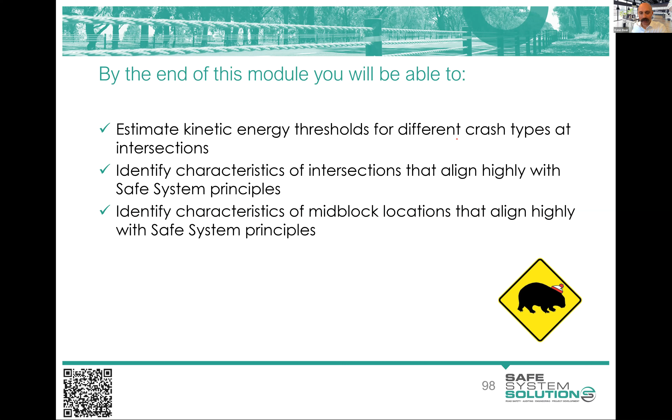Don't forget to count your wallies, of course. Hopefully you all did that last time and got your quiz answers in.

Right, let's talk about intersections. I am going to give you a little exercise to do shortly, which will give you an opportunity to also have a stretch and fill up water and stuff, but you'll do a little bit of thinking about some intersection design or form choices.

So what we do see is that risk of runoff road crashes at intersections goes up significantly. It also happens to be the one place around the network where we do see quite a congregation of point source hazards, fixed hazards, such as signal pedestals if it's a signalized intersection, but we see power poles a lot, often culverts, and different fixed objects. So that runoff road risk is even enhanced a little bit more.

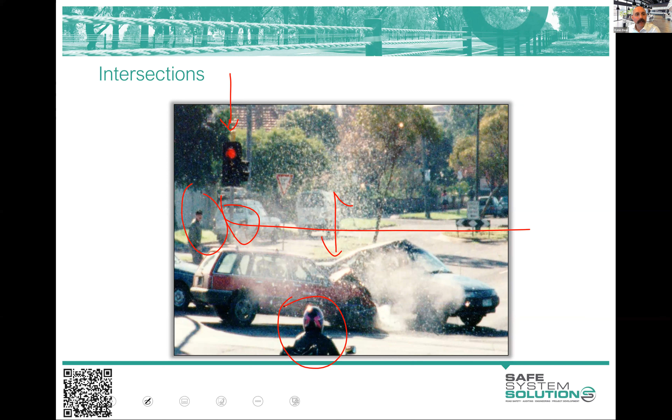The Monash University Accident Research Centre came out with a few principles for intersection design for high alignment with safe system principles. And what we see there is some interesting stuff in the way they're talking about it and thinking about it.

Now, you remember at the end of last session, we talked about exposure times likelihood times severity being our formula for risk in a safe system assessment. We're going to build on that significantly in this module, and your exercise after this module will be heavily focused around those elements of exposure, likelihood, and severity.

If we look at these principles, the first thing they're saying is, can we have fewer vehicles? That's really an exposure factor, isn't it? It's the number of people, the number of vehicles exposed to crashes would be down. Fewer intersections is also sort of in that exposure category.

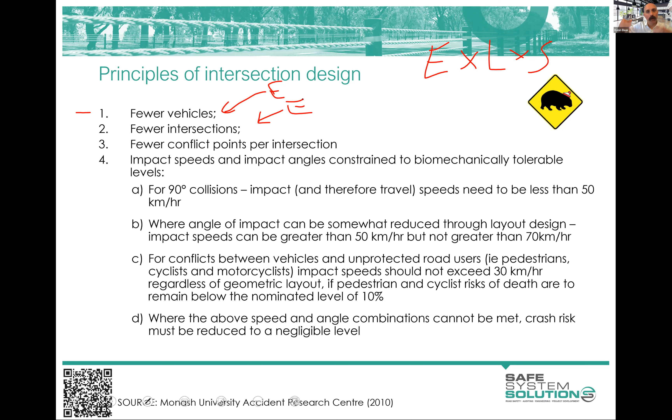If we are able to eliminate intersections, there's less points on the network where that intersection crash is able to happen. And maybe still we're having the vehicles that would use those intersections congregating to another intersection, but we might be able to do more at that intersection for risk reduction.

That's pretty run-of-the-mill transport planning style thinking, to consolidate access points and intersections if you can. But across Australia and New Zealand, we have a real tendency to provide hugely free access onto our often arterial road network and higher speed network, where we're having side roads, driveways, and access points.

And if you're able to reduce the exposure by reducing those, you're getting better alignment with safe system principles.

Then we go into fewer conflict points per intersection, and that is a likelihood factor, okay? So you may be thinking, is that not an exposure factor? There's less conflict points. But no, we say if there's still conflict points available at this intersection, we'd call it a reduction in the likelihood. You've made it less likely to crash, less conflict points. If we've eliminated those conflict points by closing the intersection, for example, or grade separation, flyover style stuff, we've changed the exposure. But this is a likelihood reducing factor, along with all those other wonderful things like ensuring good guidance through the intersection, advance warning, clear travel paths, and those sorts of things.

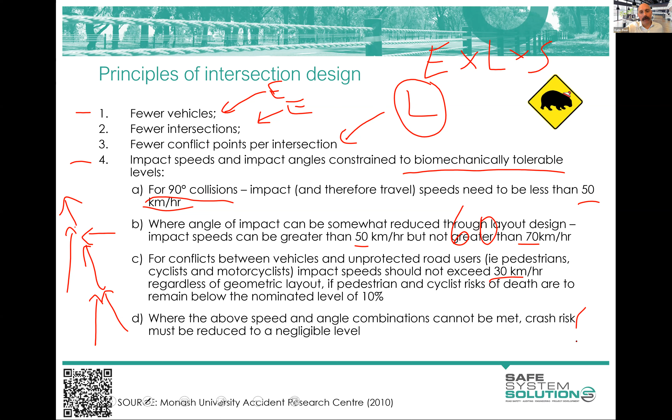When we add vulnerable road users into the mix, we're looking at 30 kilometers per hour or below to try to really dampen the energy of that to something that is generally tolerable to humans. And if we can't meet these requirements, we're really wanting to alter risk and reduce risk to negligible levels if we possibly can. I'll talk a little bit more about that in a bit.

So we gave you some of the graphs and some of that colored chart last session. I'm putting some more stuff here. We see for car-to-car style crashes, pretty much at intersections, we're fairly comfortable with bullet vehicles at 40 kilometers per hour or below. Really, even 50 kilometers per hour or below is the ultimate threshold there at 90 degrees.

But then 60 kilometers per hour for anything in between that to the head, we know that we can get more speed, which is survivable. And this is using something like KEMM-X or KEMM, which is the kinetic energy management model. We plug in speeds, vehicle types, geometry of the intersection, and it's able to spit out the kinetic energy and tolerance levels.

Now, in a safe system assessment, you're not going to be required to go to that level of detail and precision. What we're providing you here with this table and the color chart, that's enough to give you a general indication of how severe these crashes might be, okay? We're not going to need you to go to that level, but you might like to know that there are computer models you can use to generate some of these ideas of forces and biomechanical tolerability.

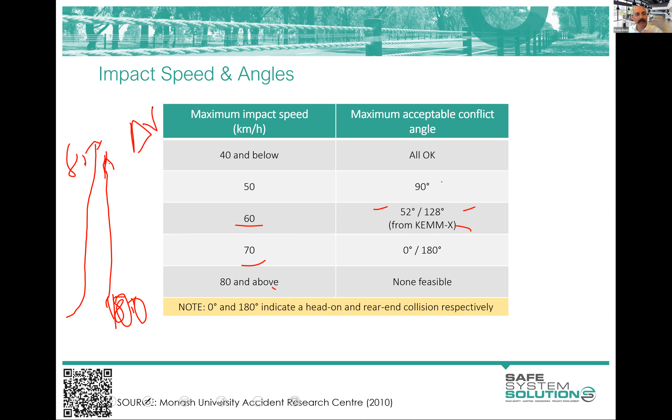So we're back to the physics of it. For new or existing intersections, you can work out your angles of impact - you don't even need to be this precise, you can do it at a higher level. So, vehicle coming out of this new proposed intersection, vehicle coming down there, that's about 90 degrees, somewhere around that.

So the speed for passenger vehicles, we're talking somewhere around 50 km/h or below is what we'd be aiming for there. On the other side of the road, they're sort of in like that - we've got a bit more angle to it, so maybe around 60 for that side because it's got more angle. And if that crash happens over there, this one coming in, that's pretty much a right angle, we'll give that a 50 as well.

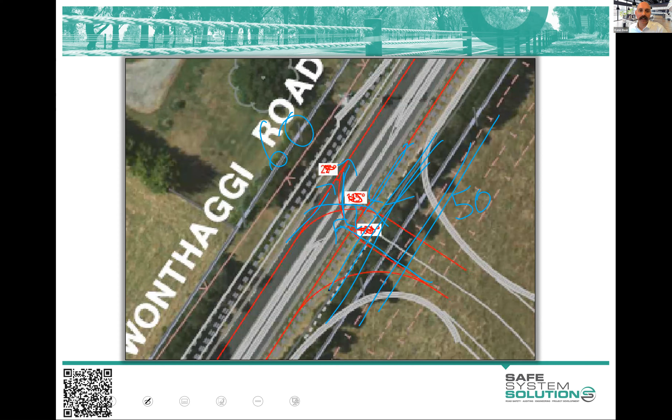So you're able to start doing that broad brush looking at speeds and angles, thinking about passenger vehicles. Of course, if you've got other road users - maybe a shared path crossing or something - you'd be thinking about vehicle speeds through there and the tolerability for vulnerable road users, pedestrians, cyclists, and whether we need to slow vehicles at that point. So it's becoming angles, speeds, and road users involved in these crashes to give us a real indication of what is tolerable.

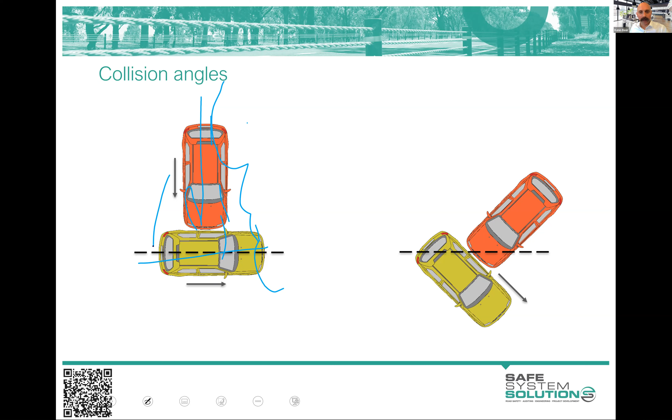I talked briefly about secondary crashes, and I'll give you an exercise shortly. Thinking about vehicles, it's pretty rare you get a very square, clean right-angle crash directly like this. More often the vehicles have attempted to avoid, and clipped, and hit in all sorts of ways - it's very chaotic. But there are secondary crashes, which we talk about as run-off-road. Sometimes they start with an intersection style crash and then run off the road.

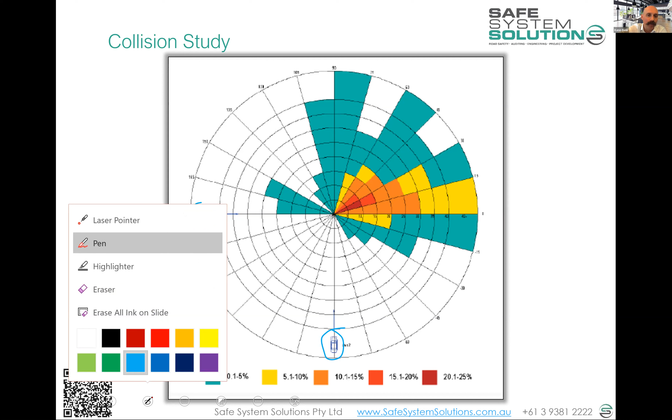The Centre for Automotive Safety Research at the University of Adelaide did a big study of lots of intersection crashes that had secondary crash impact as well - vehicles leaving the road, hitting poles, culverts, other roadside furniture and the like. They replotted all those onto an axis, and you can see the bulk of the secondary crashes going into those sorts of areas. Now, did they need a big piece of research to tell us that? Probably not - I think you'd all have come up with a similar conclusion.

There are some interesting anomalies of avoiding and clipping and those sort of things, but just something to remember in our intersection design and thinking around risk at intersections.

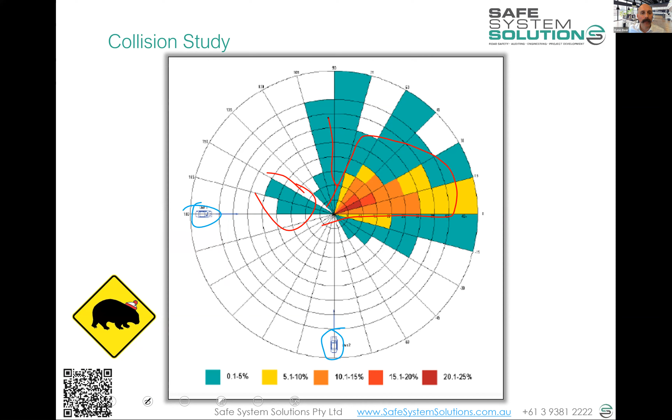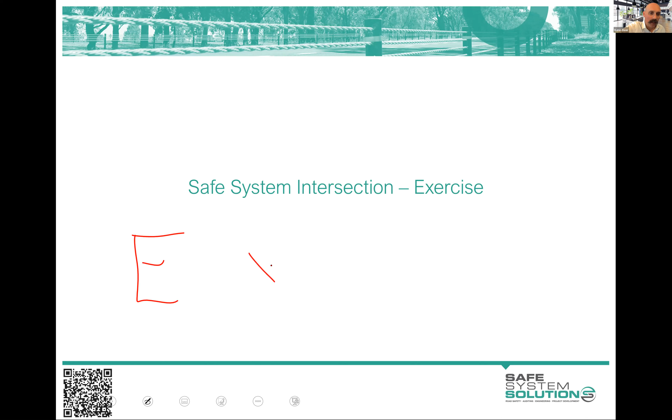Okay, let's get you doing something, because I know you're all chomping at the bit to use this exposure times likelihood times severity, and that's what we're really going to be focusing on here - well, part of what we'll focus on. Let me give you the scenario. Actually, I'll pause before that and check in with Cassie to see if there's anything I need to deal with, because I want you writing into the chat as I go, and I'll answer or talk about topics as we go.

Kathy, anything pop up that I need to deal with?

Yes please - there's a question about reducing the number of intersections, which you talked about earlier. That may lead to increased volume at remaining intersections, so does the overall network exposure stay the same? Really good question. In a safe system assessment we often have pretty good traffic modelling to work from, so you can actually attribute and quantify that and utilize it in your scoring.

If we've drawn a scope boundary around our safe system assessment, you just make it clear in your assessment that that is what you're dealing with. And if that reduces the traffic volume at that intersection you're scoring, you'd probably note that this will distribute traffic to other areas, and it should be noted, but you tend to look just at that intersection if that's the scope of your assessment. The reason is, where do you tend to stop if you go too far out that way? But the principle you're thinking about is really good.

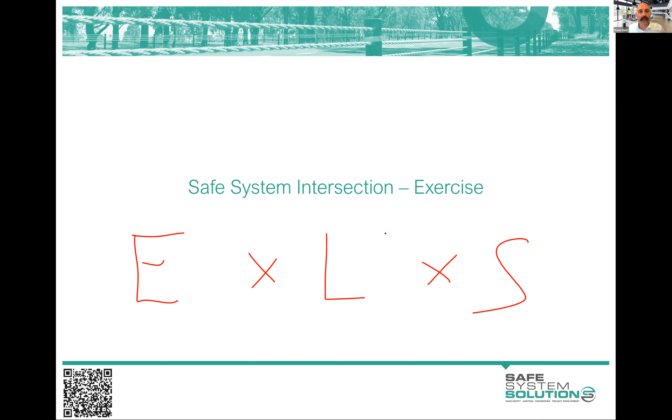Now we do have a fact sheet, and I'm jumping way ahead in the course here, on how to deal with projects that have multiple routes and thinking about multiple intersections and the like. So we'll provide you with some more specific guidance on that in one of the later modules. Good question though, thank you. Thanks, Ken, that's all for now.

Okay, well let's do a little exercise here, and I'll explain this intersection first, and then I'll tell you what you're going to have to do.

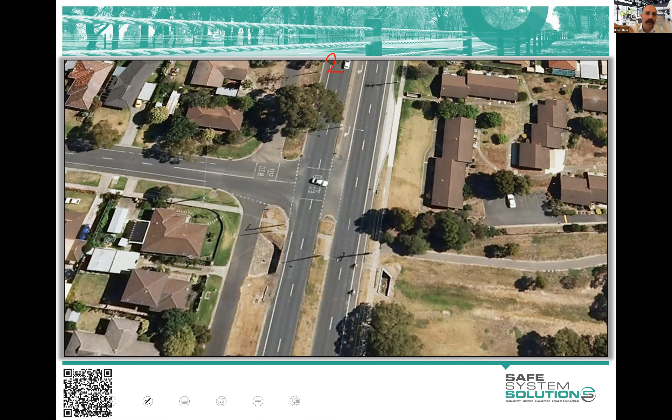So here we go. We've got an arterial road with 21,000 vehicles a day, we'll get 10% heavy vehicles, speed limit 70 kilometres an hour. We've got a side road here with 1,800 vehicles, 50 kilometre per hour default speed limit.

We've got here a shared path. This is a culvert drainage thing, sort of, water goes in there and spills out into there when there's big rain. What else have we got here? We've got a bus stop. And you can see there a little, I suppose, Danish offset crossing, or Z crossing as some people call it.

Interesting, I would say that's the wrong way. We like our Z crossings or Danish offset crossings to face into traffic like that. That's an aside, that's not the purpose of this exercise. I was just, as I was drawing over it, thinking I'd like to see that the other way. You want people to walk in and down, facing traffic or crossing facing traffic. Anyway, they're probably constrained by this. Sorry, I've gone on a tangent there.

Anyway, what else can I tell you? Up the road here, about 2 kilometres, is a set of traffic signals. Up the road about another kilometre is another set of traffic signals, probably 800 metres or so. What else can I tell you? This is a service road, takes vehicles in both directions, really just providing access to a handful of houses. It's got a little exit point up here as well, and there's another opening quite a bit further down. Residential area, school about 400 metres down the road, the side road.

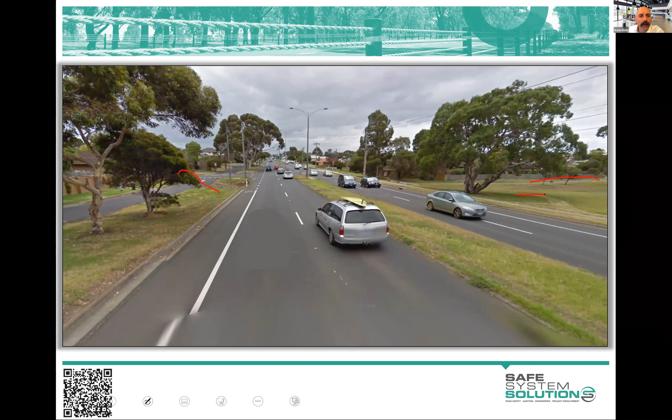The intersection does have a crash history, and the crash history involves vehicles turning in like that and being struck by vehicles coming through here, and vehicles coming out and being struck by vehicles there, and a more minor incident there. So quite a decent crash history, but we're not always driven by crash history these days—it's not the only way to work out risk. This one has presented itself in crashes.

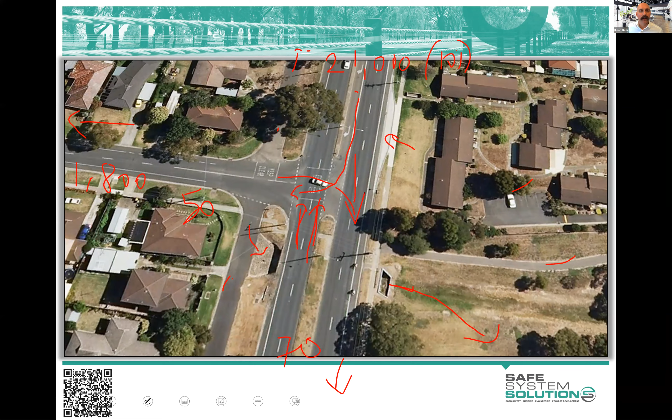So your exercise here is to redesign, redo this intersection to remove fatal and serious injury crashes forever. Okay, we'll come as close as we possibly can. And you've got a budget of $3 million to do that.

Now you might be saying, well, I don't know how much stuff costs. That's okay, I am your cost estimator tool. You can simply type into the chat 'cost' and then put cost-dash of whatever you want. Cost of putting up warning signs, and I'll go $3,000.

Putting up some warning signs, approaching the intersection. Cost of grade separation, a big flyover, I would say $63 million.

So anything you want cost estimated, I'll do it instantaneously. Or if you've got a good idea of the cost yourself, you don't need to put the cost in, but you can say I can do that within that budget, no worries.

So you've got a budget of $3 million. You can't close the intersection. Now, I know you were thinking back to those Monash University principles, less intersections. We just talked about it, saying oh, I'll just close off that. That's going to be pretty good for at least those intersection-related crashes. Might want to do some other things too, but that's pretty good.

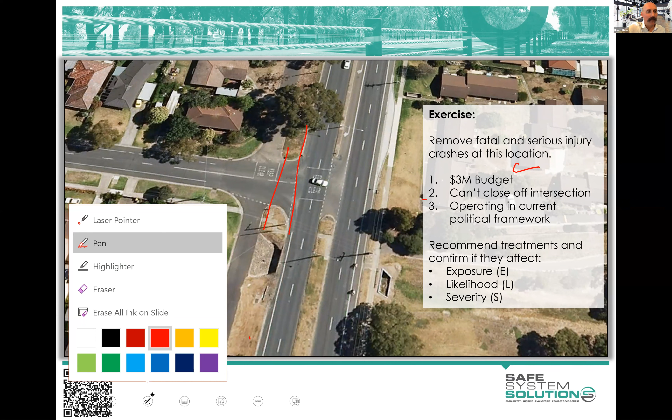Unfortunately, we can't do that. We've done the community consultation, and it's been decided by the minister that this has to stay open. Not only open, but all movements have to be available in and out of the intersection onto the main arterial. You can tweak the service roads if you want, but you have to be able to turn in from this way, out both directions.

And the third constraint is that you are operating in the current political and operational framework that you are currently in. This means that if you're proposing something quite radical, you need to give us some indication of how you're going to navigate this through the system.

If you're a consultant, you're trying to convince your clients and move it up the line and get it out there. So how are you going to help do that? Or if you're in a road authority, how are you going to convince your boss, the public, the community, and the politicians that this is the way to go? So have a think about that if you're really pushing boundaries.

So what I'm going to ask you to do is pop your ideas into the chat when you get there. But each time you say something, tell us whether that influences exposure, likelihood, or severity. So if you were to say, I'm going to do a warning sign down here, intersection ahead or something, you put warning sign and then a little L after it. You type in warning sign, L, meaning that will reduce the likelihood of crashes.

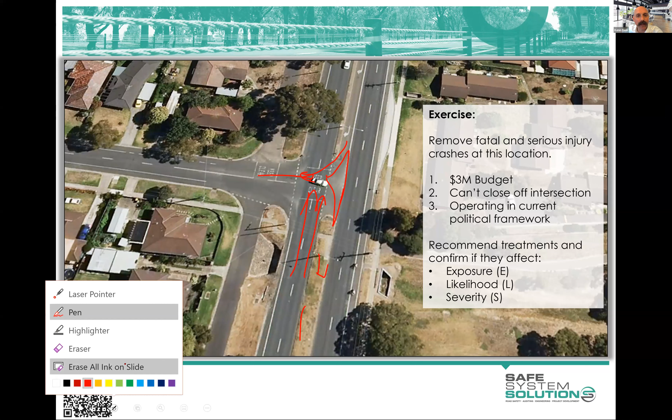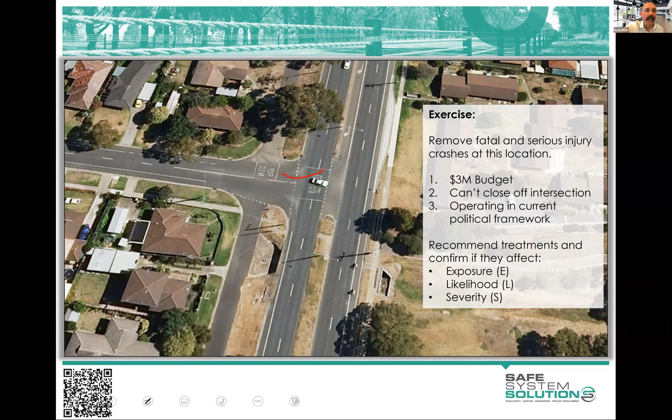So what else we got? Okay, some people wanting left in, left out with U-turn facilities, and that provides some interesting reductions in, I would say, likelihood of crashes. You know, we've still got an intersection there. We've still got the people coming in, turning, or doing U-turns down here and coming in if you block that. So we kind of still do have the same conflict points.

This is a little bit like what we said. We're sort of moving conflict points up here to potentially different, better scenarios, but exposure-wise, I'd say sort of the same, maybe reduction in the likelihood of crashes. And severity, well, yeah, maybe, because we've got to sort of turn out there, or we're going to come in there, and so the angles will potentially be better. So I'm liking that, a bit of severity reduction as well.

What else do we see? Yes, some acceleration lanes, and then some people talking about, okay, raised intersections, raised crossings. So people are saying some raised thresholds on the side road here. So that's an interesting one. Seeing some raised thresholds on the side road. So that'll slow vehicles approaching, and that's maybe nice. Maybe slow vehicles entering, and maybe stop them taking a last minute dash in there to try and beat traffic and the like. So reduced likelihood, I'd say, by a little bit.

They're potentially a bit of reduced severity if there are any pedestrians trying to cross this way.

Then some others are sort of saying, well, what about raising that whole intersection? Raised intersection. That's an interesting one, isn't it?

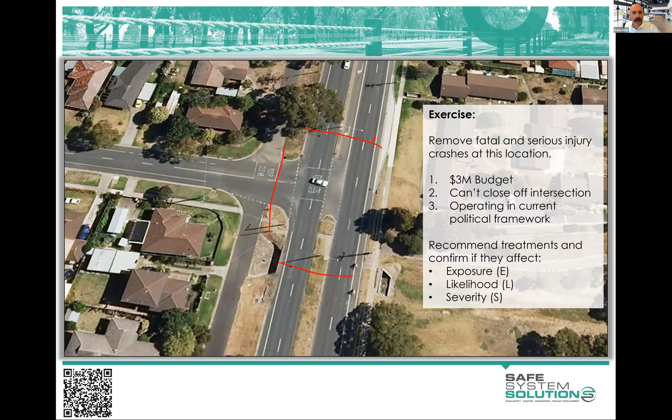Really great thinking. A lot of the thinking I can immediately see we've got some pretty good experience in the room, or people who are sort of thinking quite well. So a lot of people are saying signals, and you'll see me use this little symbol and tick which one it is. Really likelihood. We just talk about likelihood factor.

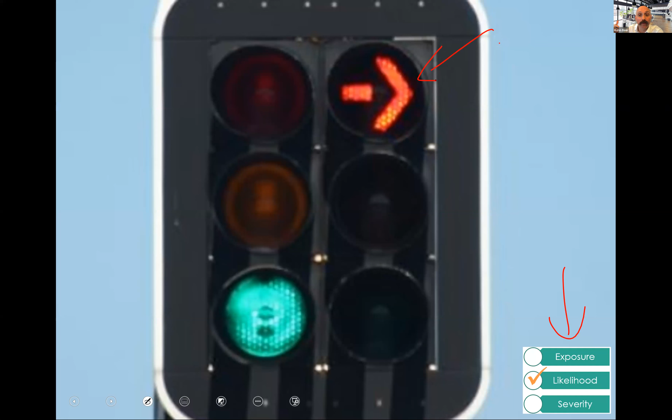We know there's things that can be done, like fully controlled right turns, that really help reduce the likelihood of crashes even more, getting the most we can out of these traffic signals. So we know that they're a proven technique for reducing the likelihood of crashes.

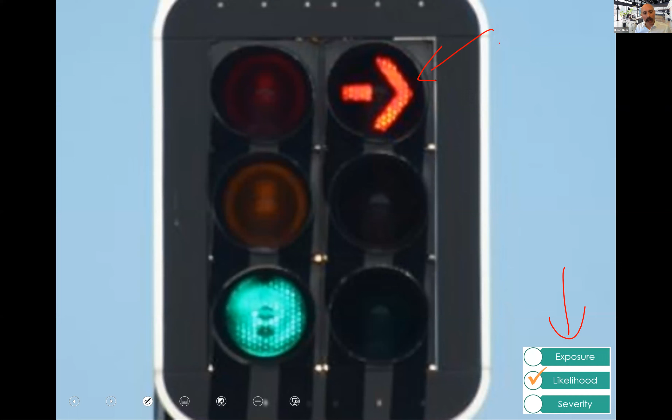And I could take this, I could do the same heat mapping, outer suburban Brisbane, outer suburban Sydney, Adelaide, Hobart, Auckland, you name it, pretty much everybody's got this issue where they have the space and the roads are higher speed and the intersections are signalized because the traffic volumes have got to that point, they signalize them. And that is where the bulk of our death and serious injury is happening in these areas.

And in fact, if you take the top 100 intersections on pretty much any of those cities or states, you take Queensland or Victoria, you'll find that the bulk of the top 100 are signalized intersections.

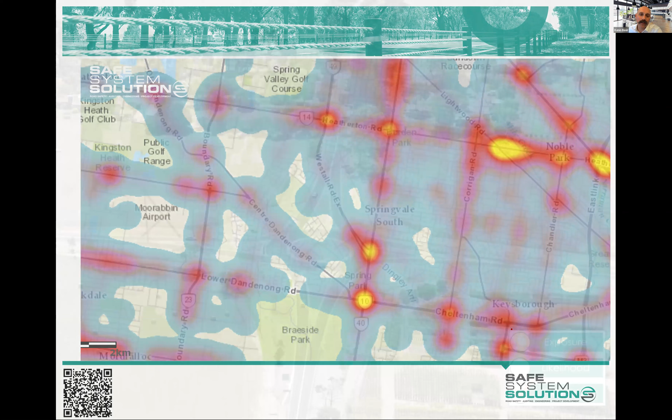And then the first thing I suppose to say is, well, does a roundabout perform any better than that? I mean, certainly we know that from a traffic operations perspective of moving vehicles through it, we don't get as much throughput through a roundabout. And some of you are 10 times the traffic engineer I'll ever be in terms of understanding traffic flow theory and the like. But this is not going to operate as well from a vehicle throughput perspective and saturation and everything like that.

But what it does do is it significantly addresses the severity of crashes. And I'll walk you through why that is shortly. But we've got a real severity reduction technique here with a roundabout.

Now, like a lot of you probably discounted a roundabout straight away for a number of reasons.

And the other thing some of you probably immediately wanted to discount it was, well, it's a major road and you've got a sort of minor side road, and a roundabout works better when the flows are kind of balanced. Not sure it's the right form from that perspective.

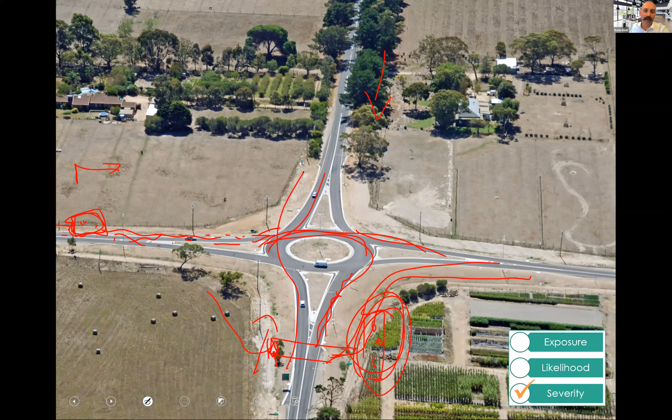There are ways, though, I think we can still think about that roundabout still being an option. We can think about things like metering of a roundabout - always fun. Put a pedestrian crossing up here, maybe have your pedestrians come up through here, and then you put a loop down the back here. So when the banking of traffic gets to that point, these signals trigger, and some of these get out and go that way, and some of them get in here and store up. You can get much more life out of roundabouts from a traffic perspective by doing those sorts of things, and maybe we don't need to make them as big as that.

Now, this is a very, very different road environment, isn't it? But I do love looking at this one and saying, okay, in the UK, it's just a little bit of paint, isn't it? A little splitter island as well, but a bit of paint. So a larger vehicle, maybe a service vehicle or something coming through here, could track very easily over the top of it. Okay, so that's good.

But then you might say, well, what's the purpose of it? What's the point? What safety benefit are we going to get out of that? We're not getting any deflection, so are we going to get speed reductions and things like that? But the key element of this is that anybody approaching this does not believe they have ultimate priority.

Whereas if we have a set of traffic signals and there's a green light, somebody believes they have ultimate priority. If it's a road where the intersection's got a give way, passively controlled, give way or stop sign on the side road, the main road believes they have absolute priority. I mean, they do under the road rules, they have absolute priority. Right? But absolute priority comes with lack of attention, continuous high speed, and really there's nothing to disrupt that sort of continual flow of the vehicle.

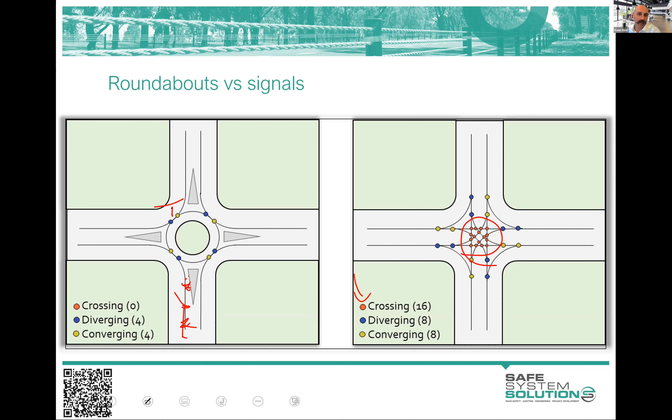Interestingly, we don't actually give roundabouts a likelihood reduction in a safe system assessment. You'd think we should, because we've got less conflict points, less ways to crash. But we know from history of crashes that we have lots of rear end style crashes, minor, but lots of them. And if they're multi-lane roundabouts, we've got merge type crashes as well. So we tend to keep it simple and say a roundabout is a severity reduction only intersection form compared to signals or passively controlled intersections.

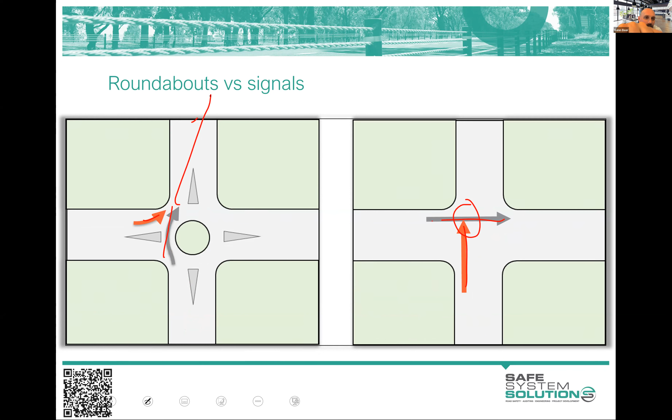The crash angle is better. Back to vectors again - the crash angle there compared to this one will bounce off. It's a much friendlier crash angle.

This one goes back to the point that people drive in all sorts of states of consciousness. They've worked a double shift, or been at their brother's wedding and pulled an all-nighter and then driven home, or they had a fight with their partner. We would love everybody to be alert and switched on - they're not. There's so much driving going on that's not with it. You may have been in that state - driven straight through a red light and thought, did I just run straight through a red light? Or done 10 minutes of driving and don't remember any of it. We're not with it half the time driving.

There are engineering features of the road environment we can put in that bring people back to attention. A roundabout's particularly effective, as is any horizontal or vertical geometric change - anything that goes up and down or side to side is a really great way to engage a driver in the driving task. A roundabout has this wonderful ability for people who are half asleep or zoned out to approach it, and bang - back to reality, slow down, look around. Amazing wins for road safety. Yet a set of traffic signals is so much less effective - red light, straight through occasionally. So that's a big win.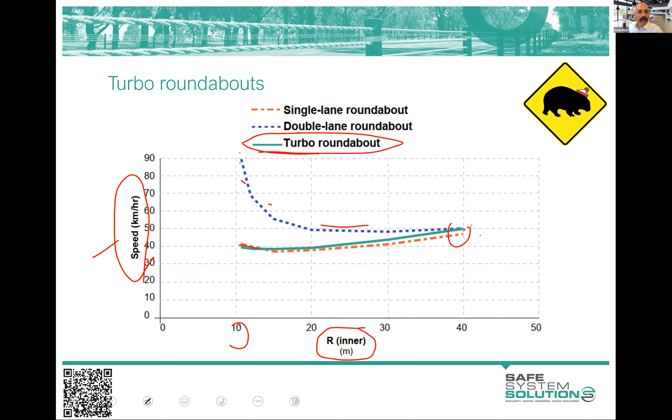For those not familiar with a turbo roundabout, it's a 2-lane roundabout where you have a raised separator coming in, a raised separator within the circulating carriageway, and a raised separator going out. If you want to do a right turn, you get into that right lane and come around and out you go. If you want to go left, you get into that left lane and off you go. But there's no ability to go straight through because of the raised separator. So the speeds are obviously down. It's nicely channelized and quite a neat, effective intersection form.

And this is another one, and there's a couple of things I just love looking at this part. What a great capture of a roundabout there - it looks like the truck's pulled out and made this mistake, and we've got the white van there. Look at the angle there - beautiful. Hey, crash, that's going to be not severe at all. I know that because of the angle, but I also know the speeds are going to be low.

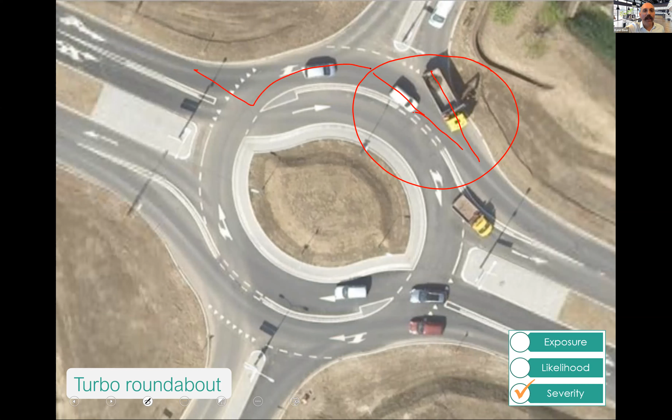This is a sort of real radial roundabout - they're coming in and then going around, so we know the speed's going to be low. This is just wins all around. If this was a standard cross intersection and this truck made the same mistake, came out, and we've got this white van coming through at 70 kilometers an hour or something like that, we're in trouble, aren't we?

And I'll show this one, and then I'll see if we've got any comments or questions that have come in. But this one, you look at it and you're just like, wow, it's a mind blower. But I think from on the ground, it wouldn't be as complicated as it looks.

It's another Dutch example, and we had this Dutch engineer that we brought in from the Netherlands to talk about roundabout design for cyclists, because it's cool stuff going on there. I was showing him this and said, this is fascinating - in Australia, with those traffic volumes and roads, it would be a large signalised intersection, 3 lanes in each direction, running at 70, 80 kilometres per hour.

He just had this look on his face. He was like, well, with raised platforms, with speed control. I'm like, nah, probably wouldn't be, it'd just be a large signalised intersection. He's like, well, what about all the death and serious injury to your community? I could not fathom that you'd possibly run an intersection with these volumes like that. It's like either it's grade separated, or it's something like this, which is going to slow your vehicles down to speeds within tolerable limits when they stuff up, and certainly getting your bikes out of there. But we'll talk about that next module.

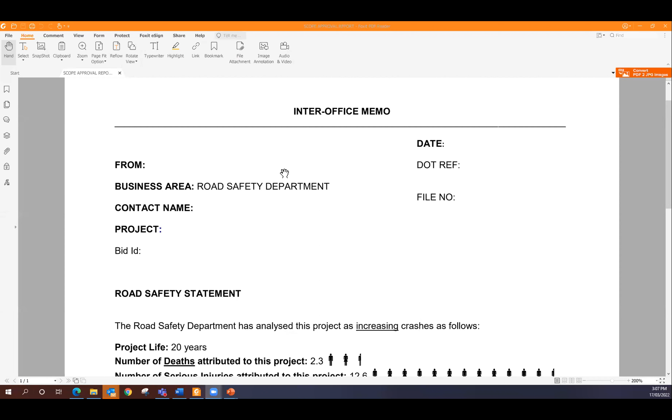Kathy, are you seeing that? Hopefully you're seeing that. Yep, that's all good. So this is the blank form of one of them. So, inter-office memo, and here we go.

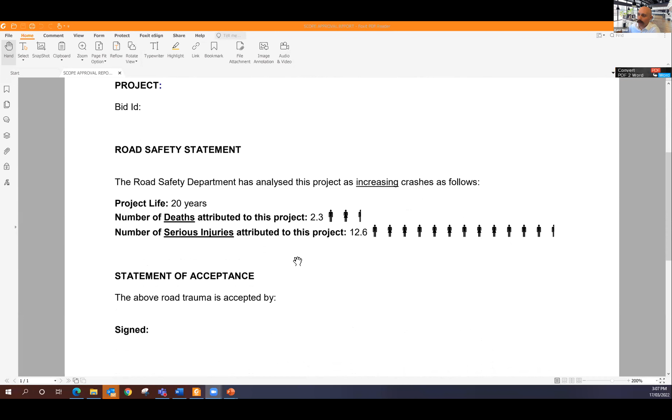So, road safety: the road safety department has analysed this project as increasing crashes as follows. Project life, 20 years. Number of deaths attributed to this project, 2.3 - people, in there to remind them we're not just talking about statistics here, these are people. Number of serious injuries attributed to this project, 12.6. Statement of acceptance: the above road trauma is accepted by, and then a space for the regional manager or regional director, they're called regional managers back then, to sign.

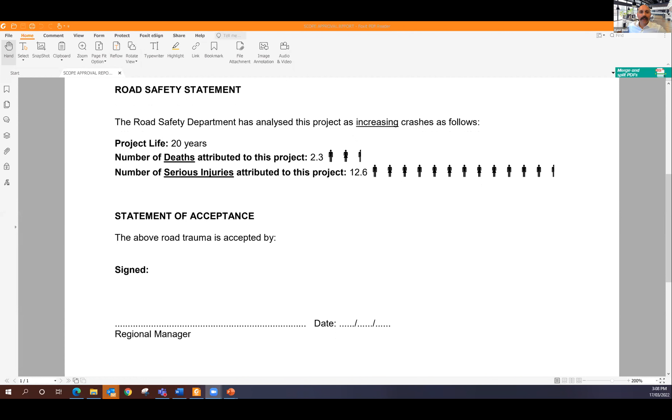Now, did anybody sign it? No. Did we get a lot of complaints and the like? Well, absolutely. And the thing is, that analysis is very easy to do. Like, we all know how easy that is. Well, I don't know, but I can tell you how easy it is to do. It's a very easy analysis. I understand that based on how effective these different treatments are, and we know that from the fact that people do these studies of like 5,000 roundabout installations before and after, and how effective they are.

5,000 traffic signal installations before and after, how effective they are, and so generally how effective these are going to be. Yes, you need to adjust a little bit by scenario, but in general you can do that very easily. And go berserk about the responsibility of a road authority is to manage many competing demands, and yes, safety is important, but congestion, blah blah blah. Okay, that's fair enough, but let's just have somebody stand up and sign it off and say, yep, okay, we made a conscious decision in managing the road environment to kill some people to move people faster through there. Well, nobody likes it when you paint it in that light.

It's the kind of reality of it, and sometimes you need to be pretty in your face to try and get a bit of movement. Anyway, we got told we weren't allowed to write those memos anymore. But what it did do was start to generate that questioning, that swell of: is this appropriate? What else can be done? And those are good discussions to have. And thankfully these days, a safe system assessment pretty much does that exact thing, but in a much more palatable, less likely to lose your job kind of way, which is cool.

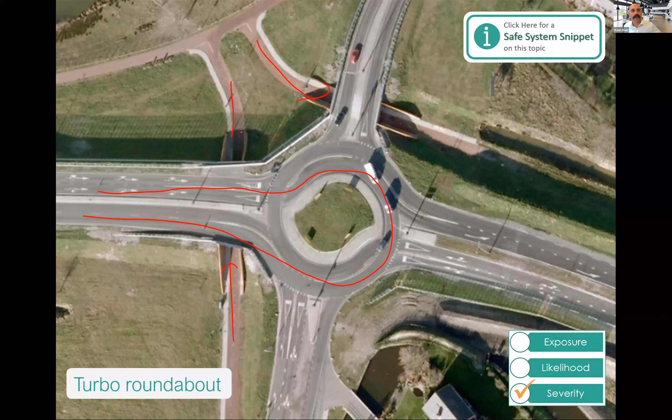So let's keep jumping forward. Now, somebody was saying sort of signalised roundabouts. Well, this is a pretty cool, I think, signalised roundabout option with even more traffic throughput ability, because you've got your cut-through in order to get more throughput from that.

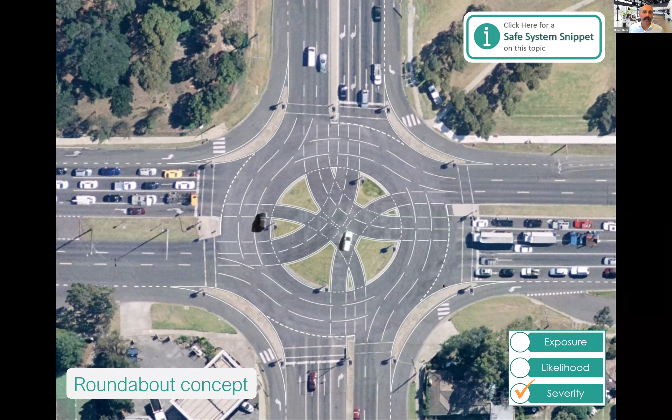Very much retaining a lot of the benefits of a roundabout through the identification of something there to slow down, to look around, to have to navigate around something. Now, this is a concept, it hasn't been built, but I love that people are saying, well, without that there, just as a straight, fast, high-speed, wide intersection, we're absolutely sure we're going to get death and serious injury. So can we change the form of this?

It was exciting that a few of you are thinking raised safety platforms. Can we do this? I said it was completely unacceptable 20 years ago, probably still unacceptable 10 years ago, but it's starting to become more acceptable that we can look for vertical deflection on major arterials. A vertical deflection, I mean some raised things, but not necessarily like your urban speed hump. We can adjust the grades and lengths of these to dampen speeds and alert people more to the fact that they're going through a conflict point.

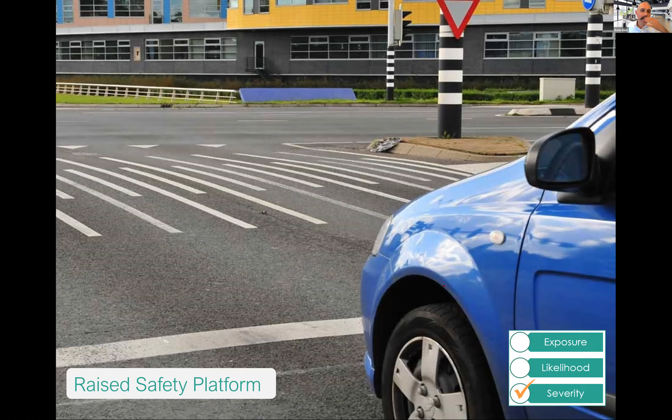And that's actually what this intersection was planned for. So they came to the conclusion, many of you did, that traffic signals were the right thing to do there from a whole lot of different factors, like unbalanced flow, consistency of up the road, down the road signals, different bits and pieces, and cost being another big one. But they said, well, we know death and serious injury happens with these signals, and the fact that they're high speed - we know they reduce death and serious injury, but what else can we do? What more can we do? How can we hit up not just the likelihood, but the severity aspects of this?

And so I decided, well, what about we slow the vehicles that are doing the damage, the bullet vehicles? The bullet vehicles are on the main drag in this scenario, aren't they? Well, that one's turning, but they're bullet vehicles. The vehicles coming out of here, they're target vehicles. They're not going to get up to speed enough to do damage to other vehicles, pedestrians and things we might need to look at. But the vehicles coming in, vehicles going out, they're bullet vehicles. So we ended up saying, well, we'll just do platforms on these approaches because there's actually no need to raise the whole intersection and disrupt vehicles turning in and out, as long as we can reduce the speed of these bullet vehicles.

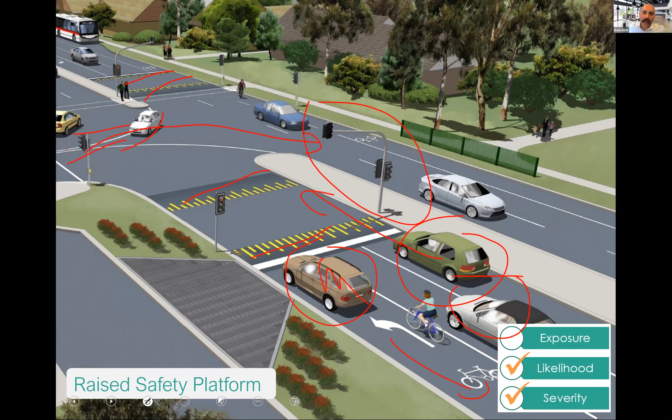And anyway, so off they went and they built that. And you notice a few things here: shallow-ish ramp grades, advisory speeds, right? Not regulatory speed limits.

In fact, advisory speeds are so much more palatable to the community than regulatory speeds. So if they took this 70 km/h road and speed limited it to 50 with a regulatory speed limit, versus putting an advisory speed in - these vehicles decide how much they slow down, they're less angry, they can't get pinged as well. So, can't be called revenue raising, can it? But we're getting the output we want, with the outcome we want, which is these vehicles going through, and they picked 50 km/h. Why? Because that is the right angle crash threshold speed for passenger vehicles, and that was their predominant crash type or crash-involved road user - dominantly passenger vehicle use here.

Now, yeah, there are bits of pedestrians and they're not meeting those threshold requirements for that. They're reducing the chance of it, but if those happen, they're still going to be severe. So it's not perfectly aligned with safe system principles, but it's getting better.

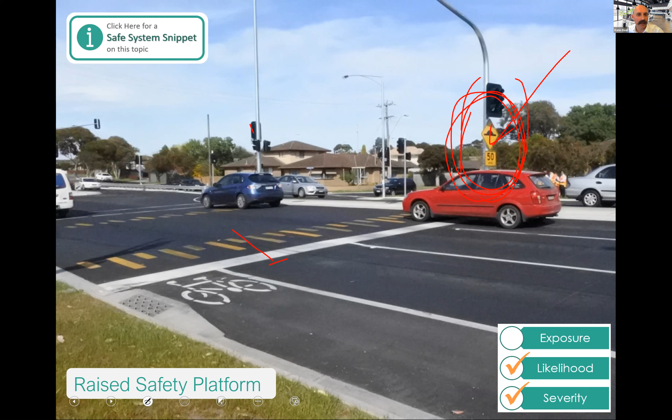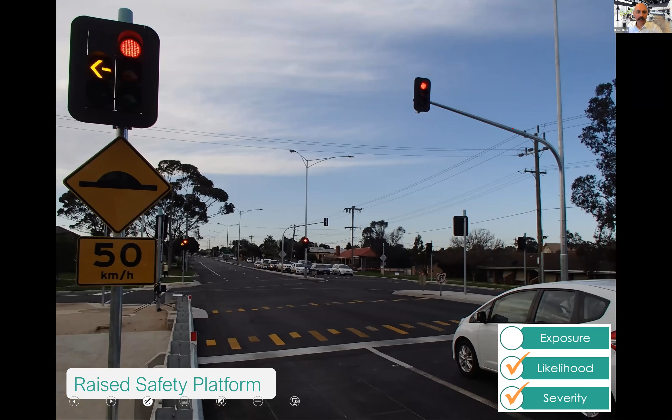And here's another picture of it, you can see there. And here's one I took while doing a post-opening road safety audit of the installation. I love this photo because what we're seeing here, obviously, green lights, and vehicles slowing down at the conflict point, the risky area. Now, it's so great from the perspective that we reduce risk at the point of risk.

Now, people get angry with this. They're like, wow, it's just inefficient, we're slowing all these vehicles down for this minute chance that this thing could happen. And I'm like, well, what about that roundabout on the next road over? Everybody slows down for that, and nobody's jumping up and down about that. It's just that we haven't done this before, and it's new and it's not quite the way we've been designing and managing and operating traffic signals in the past. But it seems to be highly effective in reducing speed through the intersection, and some recent evaluation shows crash reduction, and it's not significantly impacting a whole lot of those traffic engineering metrics around vehicles and throughput and all those other things.

But one other advantage - I'll take questions or comments shortly, Kathy - one other cool, sort of unexpected advantage of this is it reduces the dilemma zone. The dilemma zone is, I'm sure you've been in it, a place in time and space where the light goes orange and the driver is in a dilemma as to whether to put the foot down and go or hit the brakes. The presence of the raised platform reduces that dilemma zone considerably, because the majority in a whole lot of that area were forced to stop because they knew they had to navigate over this platform. So that's pretty cool as well.

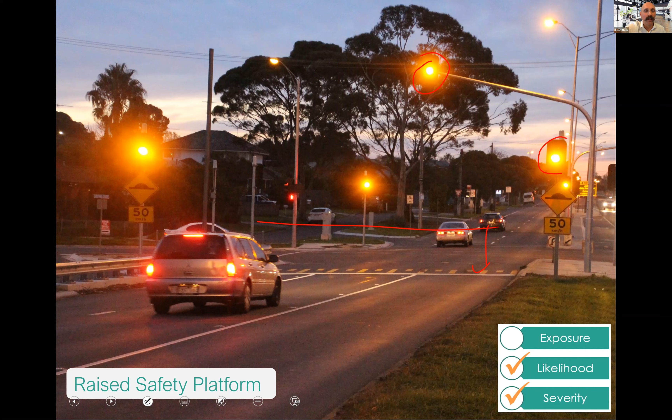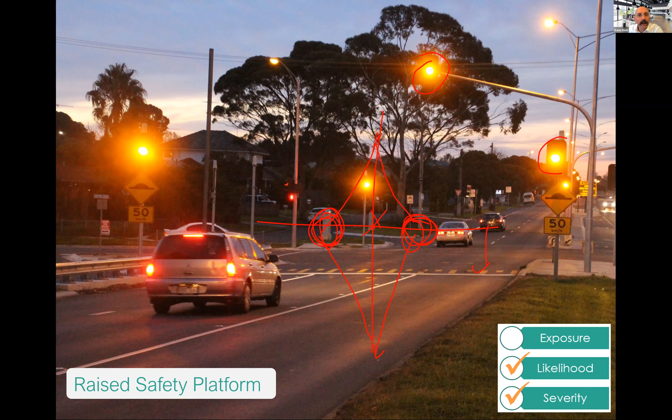Lots of exciting stuff here, and probably lots of people going, oh, I don't know about this. Let me give you a bit more assurance that it's not only that one intersection. There's lots and lots of them out there. At least in Victoria and New Zealand, they're going pretty nuts with raised intersections at large signalised intersections. And this is a pretty good example because this was a roundabout, right?

This is Dalton Childs Road, for those who know it. It was a roundabout. Roundabouts were getting ripped out, traffic signals put in, congestion easing program number 55 or whatever we're at. Just rip the roundabout out, traffic signals in, and a safe system assessment was part of this. The safe system assessment did the job of that memo and said, well, you're making things worse from a road safety perspective by doing this. We suggest you have a look at a raised intersection. And so the process kind of worked there.

This road has something like 55,000 vehicles a day, heavy vehicles, buses, emergency routes, ambulances and fire trucks running up there. This one's got like 30-something thousand. We're not talking small intersections here, are we? But this is working beautifully, and they've done the 3 intersections down the road on this stretch. They're all going really well.

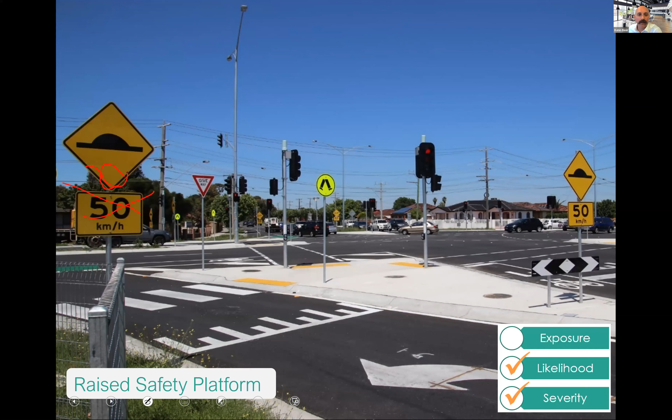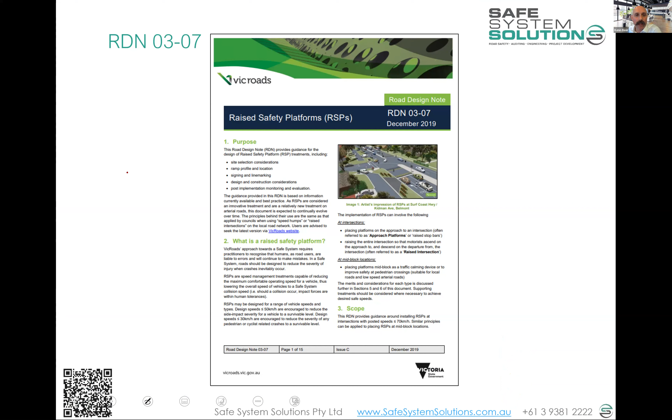There's a little bit more of it. It'd be nice to see that actually as a lower speed of 30 or something, but anyway, that's okay, we're making progress. And there's lots of design guidance. There's the Victorian Design Guidance, Road Design Note 03-07, on raised safety platforms and intersections.

That's a good one. And Austroads is getting on the bandwagon as well, with a report on the effectiveness of the implementation of raised safety platforms, a great report, with a New Zealand example on the front cover there. It really gets into some of those things we've just been talking about.

So I suppose it's not like I'm saying raised safety platforms must be done everywhere and the like. It's just that they do some pretty great jobs of addressing that severity. And that's the important thing, isn't it?

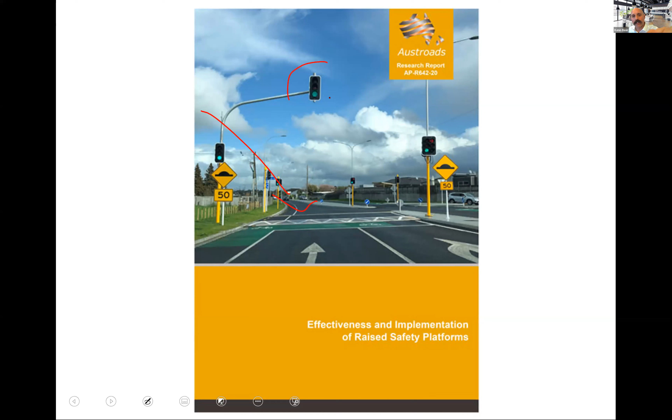We know this does a great job in reducing the likelihood, but we're sitting on a massive residual of death and serious injury that for the last 50 years we just put our head in the sand and ignored. We went, well, they broke the law. The red light, it was clearly a red light. The signals were working fine. They ran the red light. They've got to stop running red lights. At what point do we just stop thinking that we're going to get different outcomes by doing this?

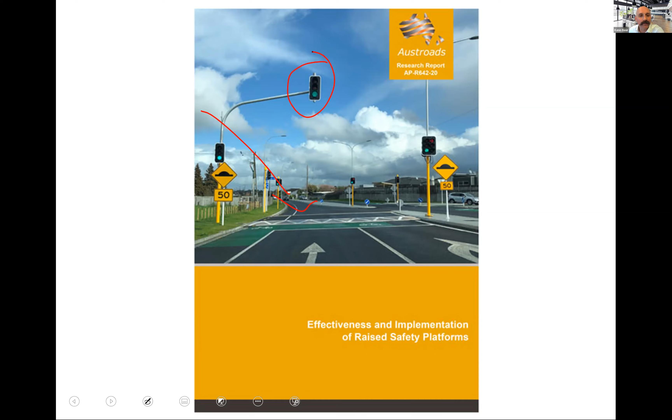Questions, Kathy, before I go to a rural intersection where you would not put a set of traffic signals? No questions at the moment.

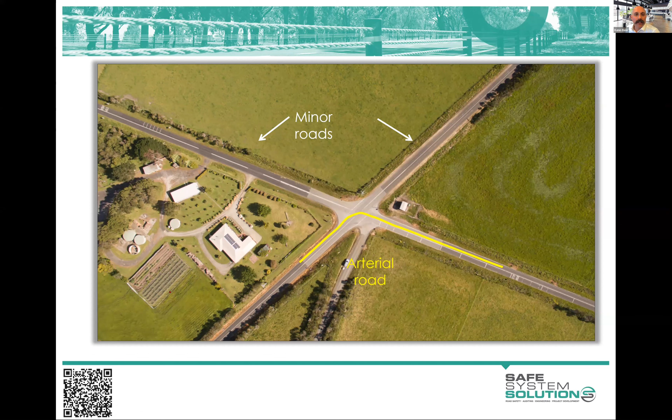So they kept pushing for some alterations. And this one, they said, well why so big with these roundabouts, and why these reverse curves on the approach? I know some of you are saying, oh, we don't do reverse curves on the approach, because some jurisdictions aren't big fans of reverse curves. Reverse curves are like chicanes, as I was talking about, but they're just to alert, wake people up, and slow people down approaching the roundabout.

They said, why not a really tiny little circulating roundabout, concrete apron, big concrete apron, and we'll slow vehicles with some raised platforms on the approach. Then we don't need to go reverse curves. So that was their plan: don't need to move this beast, don't need to require as much land. They still needed a bit of land, deviation of this road, a few other things, but it came in well under half the price.

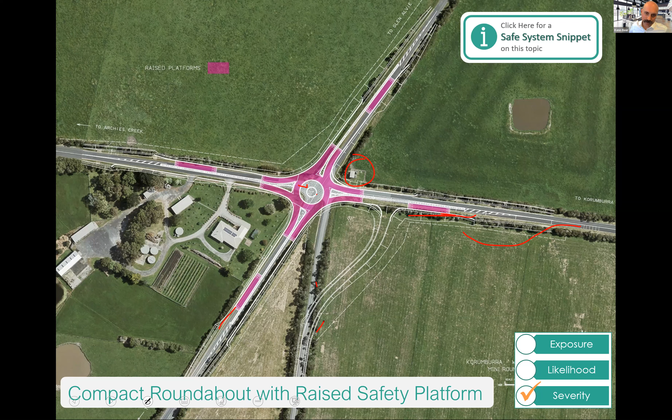And they managed to build that. I think again it's that example of just pushing hard to say, no, we need to reduce the severity of crashes at this location. So you can see the little circulating carriageway there, and the big concrete apron.

Now, we've just finished a road design note for the Department of Transport on compact roundabouts and how to design them, considering all these features. It's a huge amount of design consideration, probably some of you have many questions around this, so I think we'll make that available to everybody, because it answers a lot: ramp grades, size of different islands, where you make mountable areas and don't, lighting - you can't put lights in the middle of the roundabout now, so what do you do - drainage, lots of stuff to work through, but we'll provide that.

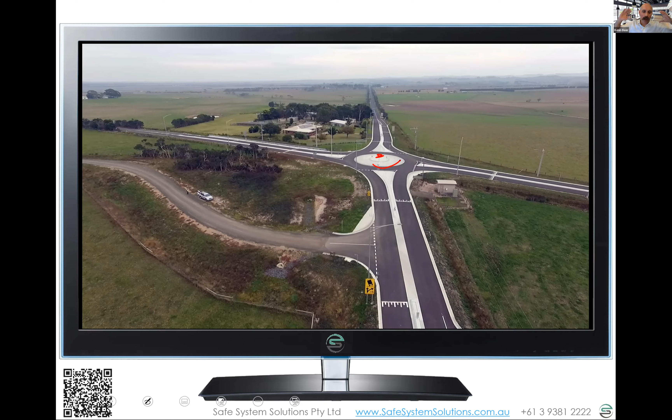But again, I'm just flagging this as an awesome principle: let's not accept just addressing the likelihood of crashes if we can get to the severity of crashes as well.

Let's do a little quiz, a poll - remember, you're not being marked on it. True or false: traffic signals are not safe system. True, false, or unintelligible question - which really means, Ken, stupid question, because you haven't given me enough information or context, or I don't know what you're talking about with that question.

All right, we better stop that. Let's have a look. What do we say?

Most people say false or unintelligible. It was a little bit of a trick question, so I probably would have gone with unintelligible, because the traffic signals themselves are not the issue. Maybe that's why people went false. It's not about the traffic, it's not the countermeasure itself. It's the context, the speed, the angles, and the energy that could be there. Without context around this, it doesn't mean anything.

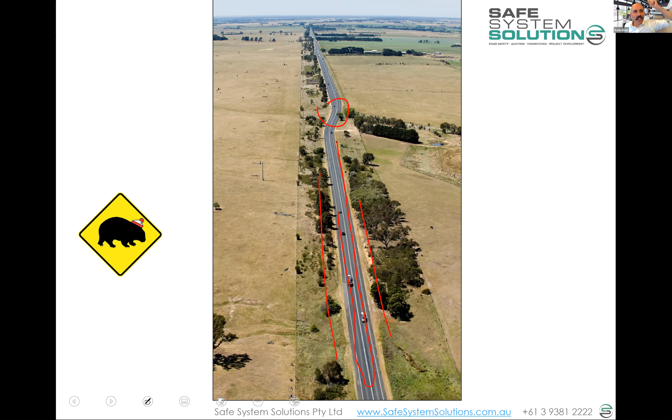And then you might think it's going to be higher risk on a curve like that. Yeah, it is a little bit higher risk, but the risks along the straights are pretty high too, and all through the centre is pretty high. So the reality is we've got this massive expanse of network that is not well aligned with safe system principles, because when people make mistakes, which they're inevitably going to do, they either run into vehicles coming at them at 100 or 110 kilometres an hour, or they leave the road and hit a tree, a power pole, a culvert, or roll over. It's all happening at extremely high speeds, and the energy is way beyond what we can handle.

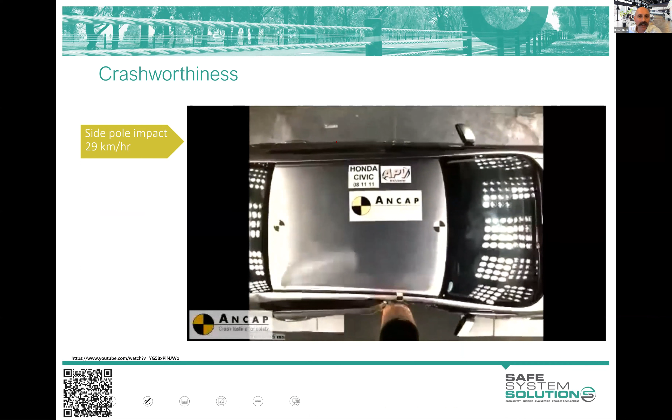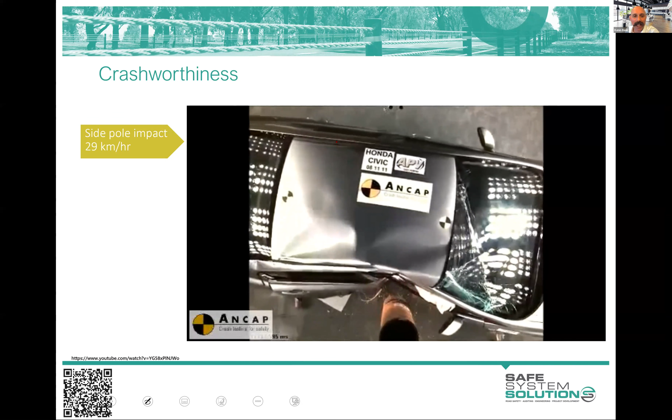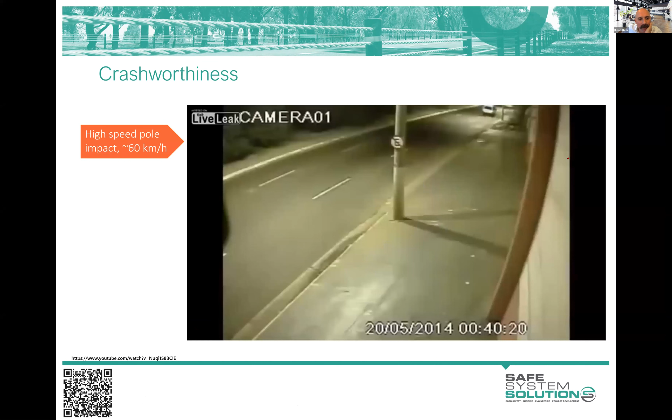We talked a little bit about side impact crash tests and what the sides of vehicles are able to handle, compared to trees and power poles and things like that. Really, we're talking 30 kilometres an hour, maybe 40 with some high-end vehicles that you might potentially survive, but it's so low compared to the speed we're travelling. This is an example of a crash predicted at 60 kilometres per hour, from the frames I suppose.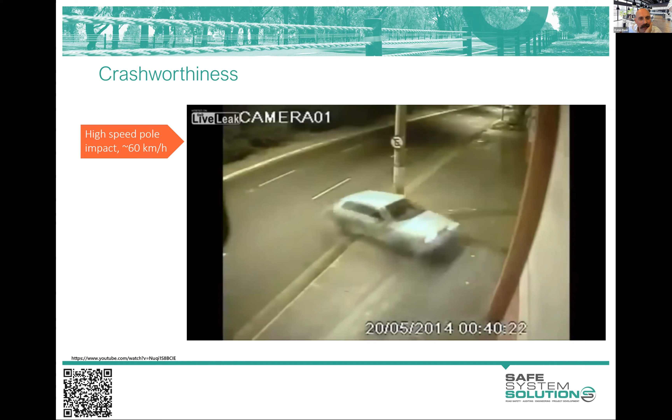The amount of energy being transferred is just absolutely staggering, isn't it? It's huge. We are so far from what we can survive as humans under this. So we know, okay, if we've got these fixed hazards which are extremely bad in terms of energy transfer to the occupants of the vehicles - power poles and trees and the like - can we clear those out? So we've got these more open areas. Amazingly, what we discover is that the casualty crash rate per 100 million VKT comes down. Well, we knew that always, didn't we?

Comes down, but look, it flattens out, asymptotes around that 4.5 or so casualty crashes per 100 million VKT. This is saying that clearing is good up to a point, but it's not going to get us too far. Now, back probably 10, 15 years ago, you'd say that's the best we can do, because what are you going to do? Put a barrier in there, and that's a hazard in its own right. Well, barrier technology has gone off the charts in the last 20 years, and now it's actually safer to have a barrier somewhere around that 4 to 6 meter area than it is to have a cleared area beyond that, because of the chance of rollover going well beyond any of that.

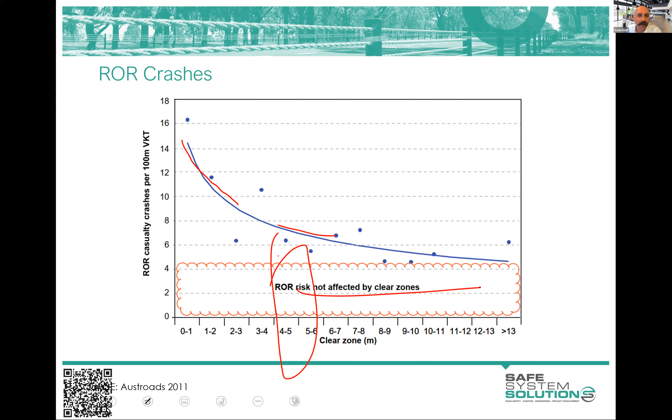And the other point is that we just can't create those clear zones. It's hideously expensive. We usually have to take out native vegetation, or underground power poles, or remove power. We just can't do it. It just doesn't happen.

But anyway, a few points around that. We know that these cleared areas, free of roadside hazards, isn't necessarily a safe place to be. It is a safer place to be, but it's not necessarily a safe place to be because of those going beyond those distances and rollover crashes. It doesn't give us the highest alignment with safe system principles. Still, valid for that sort of 4 to 5 meter is pretty amazing.

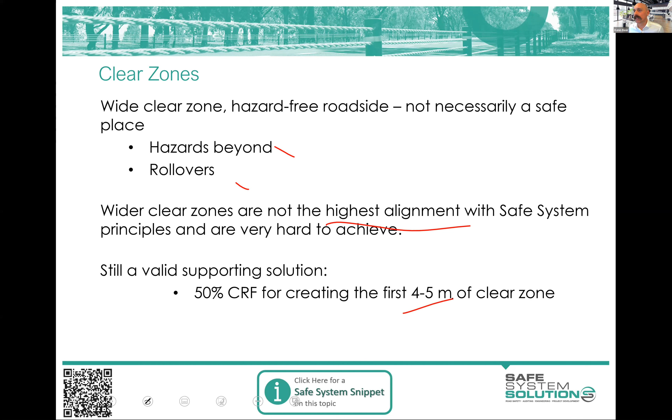But continuous barrier systems is what we're going to want to go. So we're not going to be building these types of road environments. And it's amazing to see some new billion-dollar road projects around Australia in the last few years - not like a long time ago, but a few years.

And they duplicate and they build these cross sections of road. There's a big, wide median, and we've got clear zone and big shoulders, and they cut the ribbon, they open it up, and a few months later, a car crosses the road, kills a whole family coming the other way. A brand new multi-billion-dollar road, and this is happening. I mean, it boggles the mind.

Imagine they do a new train line between two cities in a state, and they open it up, and 3 months in, 5 people die just going about their business. It would be unbelievable outrage. Yet we're just sort of like, well, they shouldn't have left the road or fallen asleep or whatever they did, right?

So anyway, the Austroads guidance has changed. We know now that we should be doing continuous safety barrier systems where we possibly can. And again, safe system assessments on those billion-dollar projects should be just demanding that.

And actually, in reality, a really great case study out of Western Victoria showed that in the early stages of the planning, the safe system assessment would have saved millions and millions, if not hundreds of millions of dollars, because it basically said, why are you buying all that land and clearing all those trees and everything like that? That's a way safer cross section, where you have some distance to an outer barrier, you have a central barrier, distance to an outer barrier - unless you're planning to add third lanes in there or something down the track.

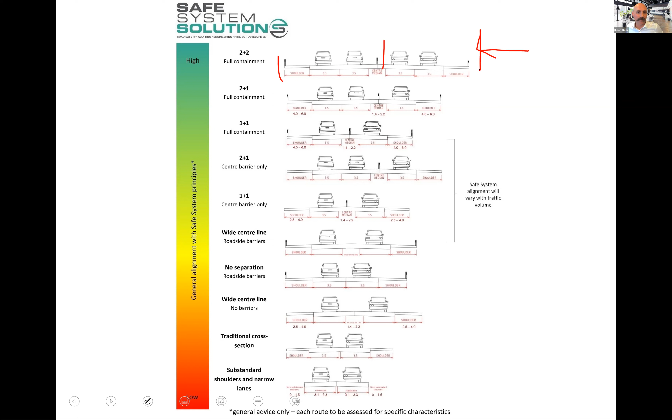Now, it's going to be hard because it's expensive, but one step at a time as we go. Anyway, I've got lots of cross sections in there and lots of different bits and pieces, which I'm not going to cover through now. Lots of fun then in the rollout of that and the specifics of the design of the barriers and which barriers you choose and where do you put them and how far do you offset them, and watching the deflection zone and how do you balance off this, and how do you not create these scenarios where the community go berserk, even though the risk is actually quite low. But those are the details of it.

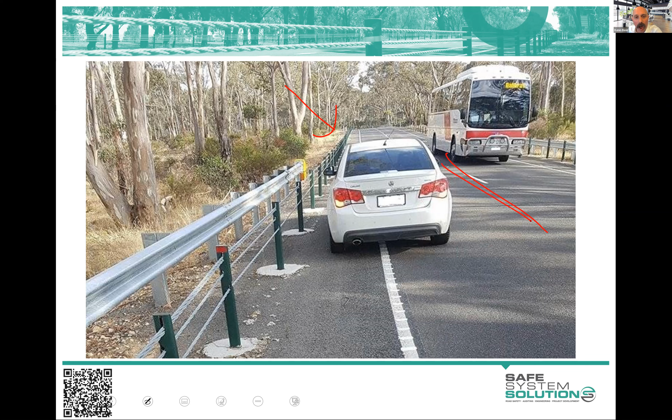But that continuous barrier system on edge, but also ideally on roadside and in the centerline, provides wonderfully high alignment with safe system principles. Questions before I get this last little case study, Kathy, and then we jump into Moodle to show the assignment?

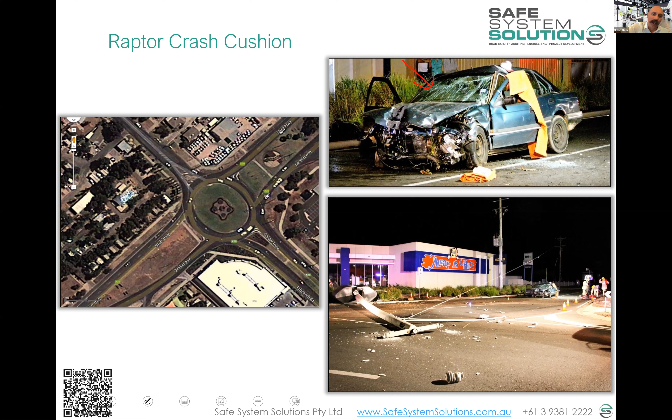But what can we do in the road environment to try to slow them down, to make it so this can't happen, to try to reduce the severity of incidents that do happen? This was an interesting one, where they came around and crashed into the utility pole, and the utility pole had one of these things on it, right? This thing is called a raptor cushion.

Now the brilliance of this is the energy management thinking that's gone into its design. What we've got here is not just like your goalpost padding. Yes, this has some padding and certainly collapses a bit like that, but it is not connected to the ground or the pole.

The design of it means that a vehicle that hits it is sort of moved on, and it rotates and rotates and pushes the energy along. Kind of like in martial arts, where they tell you to move the energy of the punch on—I've never done martial arts in my life, but I watch movies. So it rotates and moves energy along and helps it dissipate over time rather than that instantaneous stop against the pole. I just think, to me, wonderful, safe system aligned thinking, energy management.

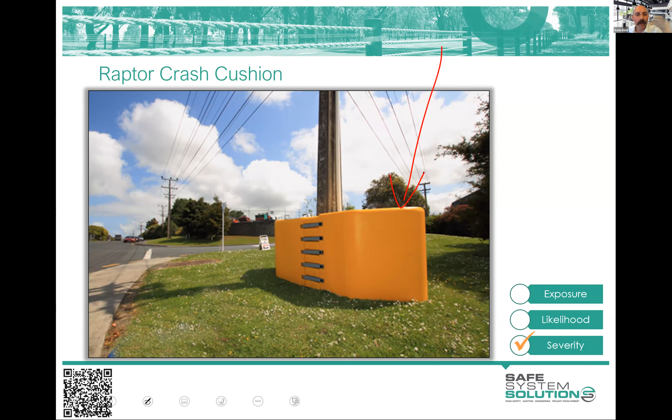Yep, okay, mistakes happen, they hit the pole, it rotates, and off they go. We have some issues with utility providers letting us put these around power pole assets often, and anybody who wants to set up a class action on some of that, I'll be happy to get involved and support, but we will carry on with the good thinking that is around that.

Let's not do that quiz. Summary points again, because let's have a little bit of a chat about what the task is, Kathy, for their homework. And I can take any questions that have popped in.

Thank you, Ken. Now we have got a question. What is your thoughts on full containment reducing ability to set up traffic control to complete maintenance, i.e. remove dead animals, potholes, etc., leading to potential road safety issues? Where is the balance between road user safety and road worker safety, which are a symbiotic relationship?

It's a really good question, and before COVID I was having quite a bit of fun going and talking to maintenance crews with concerns about central and continuous barrier systems and full containment systems, exactly this. I'll speak in general terms here, because it's a very long conversation, but the reality is that we have far, far better ability to alter our maintenance practices than we have to alter humans' behaviour out there from the general public in the way they use the road system.

So what we need to do in our design is factor this into our design. How are we going to do this? How are we going to have pullover areas? Where are we going to have gaps so we can run contraflow if we need? What are the maintenance practices? How do we set up standard operating procedures for our maintenance practices to ensure we can undertake this?

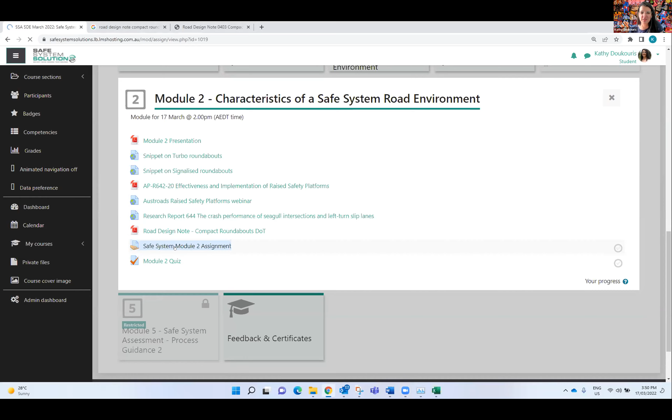There's your weekend gone. Anyway, let's have a look at the assignment. So you just click onto there and you download the assignment, which here's one I prepared earlier. And it's a Word document. Ken, do you want to take people through that?

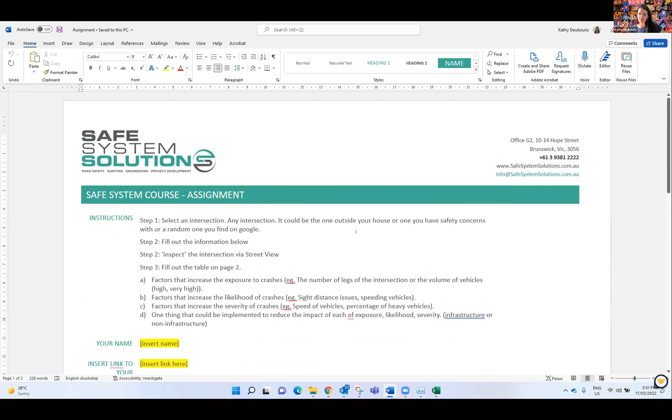You can see that okay? I can. And yes, somebody's mentioned continuing professional development. The hours keep on coming if you want to watch those webinars. You'll fill that up in no time.

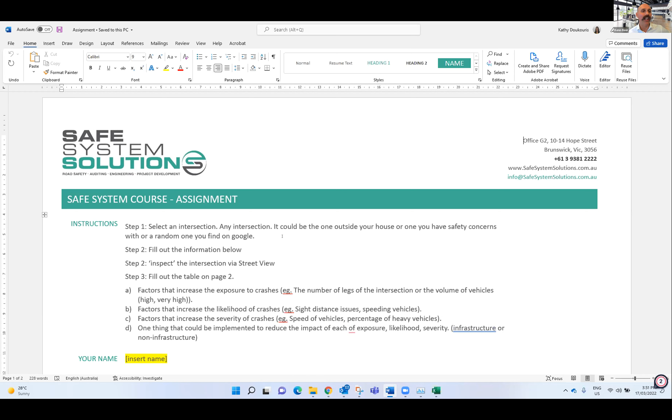Okay, so this is probably similar to the way you will see your two big assignments in this course, in that you'll get a Word document and we highlight in yellow the areas you need to do stuff. Okay, so you can see there, fill out your name, put your name in, and then you're going to be asked to put a link to a street view or the coordinates of an intersection. And this can be any intersection you want.

It could be the intersection out the front of your house, could be the one near work, could be the one you saw on holiday, whatever it is, all right? You take that intersection and give us a link to it, or at least tell us where it is so we can have a look at it too via our street view.

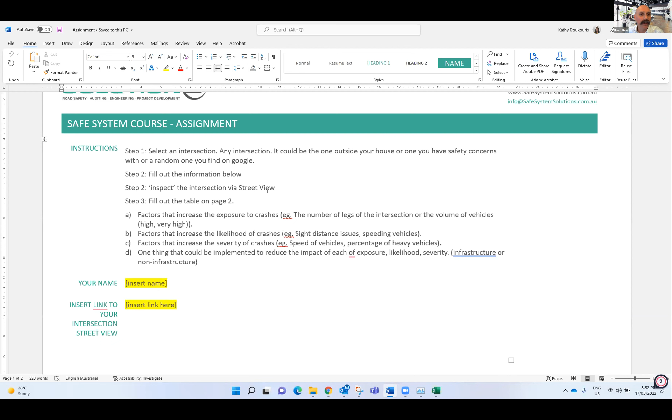Then the next thing you're going to do is inspect it, in quotation marks there, because you can do it all by street view for this one, right? Because this is just a little practice exercise. And then we want you to fill out all the information in this table.

Okay, so what we want you to do is first of all start thinking about exposure to crashes. And we want you to come up with between 1 and 3 factors that increase exposure at that intersection you're looking at. Now remember, exposure is all about the number of vehicles, the number of people crossing, the number of cyclists going through. So you might say it's a popular recreational cycle route, influencing the number of cyclists, thus that's the exposure of the cyclists, right?

You just say popular recreational motorcycle or cycling route, or it's a major arterial, or there's a big shopping center there and the desire line to the bus stop is directly across this intersection. Something that's going to influence the number of people exposed to crashes, be that in vehicles, on bikes, or whatever.

We don't want more than three, and we don't want big wordy paragraphs, because I don't want to have to read all that. I just want some dot points.

Okay, then the likelihood. That's the exposure. The likelihood - what are some things influencing the likelihood of crashes, increasing the likelihood of crashes? This could be the signs are faded, it's confusing, the sight distance is blocked, it's got poor lighting, whatever you decide by looking at this intersection and analysing it.